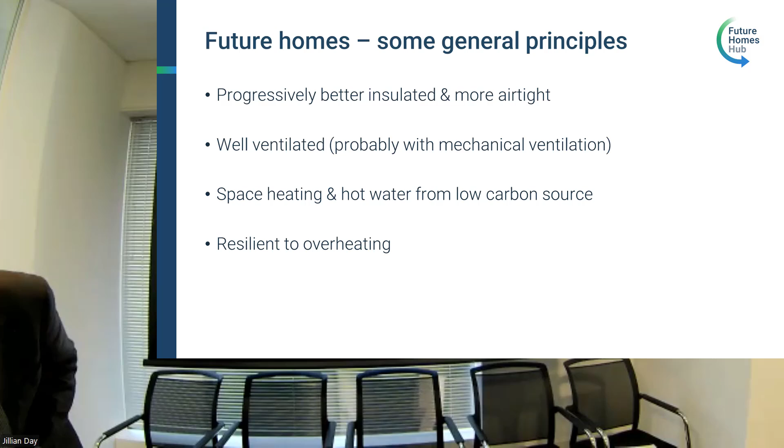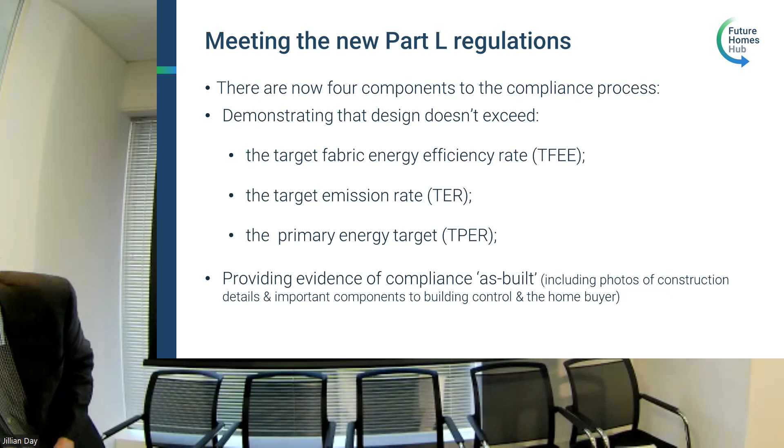But just to follow. Yeah. Yeah.

Sorry, just to continue from overheating, there's a slide that appears to be missing, which was to actually explain some of the general themes and the content of the document. And I'll try and do that while you're looking at the main criteria for compliance. And you'll be pleased to see that Part L has retained some of the catchy acronyms that we've had in previous iterations, but be very careful because they have changed slightly.

In terms of the content of the guide, overheating is one of the things that we weren't anticipating having to spend a lot of time thinking about, but actually discovered that it's very fundamental to thinking about the issues to do with Part L and compliance with Part L. And the reason for that is that there are some constraints on the disposition and amount of glazing and the aspect ratio of windows in a dwelling.

And Part O generally has two kind of components that you're needed to consider. So one is limiting the amount of solar gains, so external heat coming into the home. And then the second is making sure that there's enough provision to remove heat by having adequate ventilation. And you can see one of those is tending to reduce the glazing area, the other is encouraging you to open them. So there's a tension between the two aspects of Part O, and that has an impact on thinking about Part L.

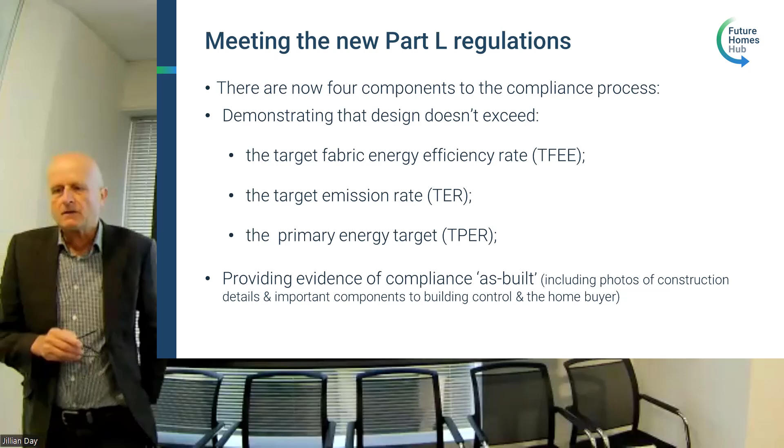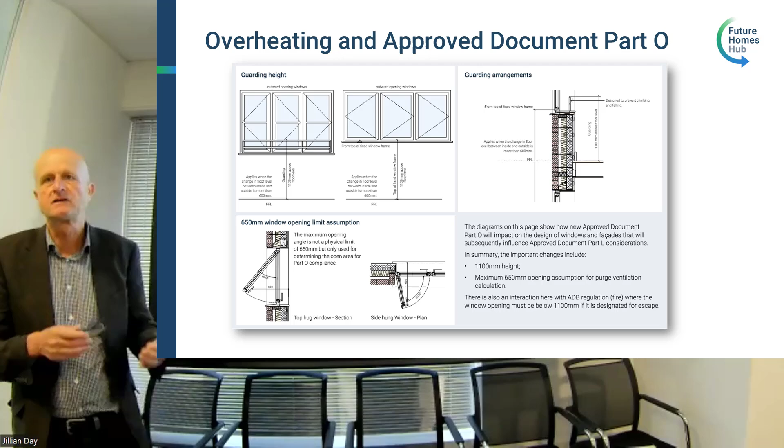And there are other recommendations to do with the safe opening of the window that, in producing the guide, we've been able to graphically draw what we think Part O says and have discussions with DLUHC about the interpretation and the implementation of Part O.

Now, the likelihood is that you won't be able to do things in that linear fashion now, that it would be really prudent to think about overheating, because overheating has an impact on the orientation of the home, for instance, the number of west-facing homes that may be particularly vulnerable, or the amount and extent of the glazing. So thinking about overheating,

Sorry, more technical glitches.

Yeah, I'll carry on. So thinking about overheating, for instance, in the specification of a window, may produce different window shapes and window sizes, which will then lead to a conversation with the window manufacturer about whether the aspect ratio of those windows can be produced, and a conversation about Part F and the increased provisions for background ventilation, and whether actually the ventilation can be provided through the window or through an overhead ventilator.

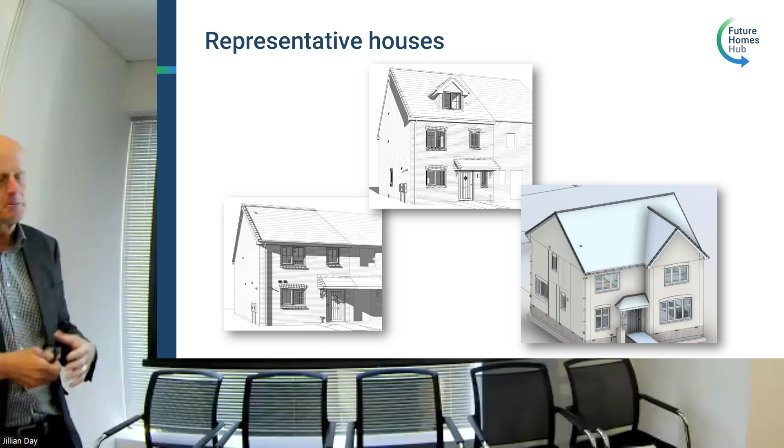And it won't be a surprise to you that of the 3 types, the room in the roof house is the one that we've found hardest to demonstrate compliance. And the reason for that is because the building regulations are now reflecting good practice and design, and they are discouraging you from creating complicated geometries, and in the instance of a room in the roof home, making a lot of surface area to enclose a very small volume. So the building regulations you will find are easy to comply with the fabric standards by making simpler homes. And of course, dealing with thermal bridging will also be much simpler.

Very quickly, before I hand over to David, to explain again, a lot of the work that's gone into the guide has been working with the steering group and with industry advisors to try and make sure that the solutions we propose are realistic ones. So if you refer to the notional building in the building regs, you'll see a set of target U values that the proposal is assessed against. But our solutions are actually ones that we think can be delivered. So we varied a little bit from the notional building to ensure that, for instance, a cavity wall could be constructed with readily available blocks and with insulation that is in readily available sizes.

And in each of the illustrations, we have 3 levels of performance. So in the masonry guide, we've started with a base case which is familiar to everybody of using a 100mm cavity and trying to work out what you would need to do if you stick with that cavity width in order to comply. We then have a kind of middle standard which explains how the notional building is working, how thermal bridging affects different building types, and the relative ease of using either fossil fuel heating, so gas in a combination boiler or system boiler, or an air source heat pump. And you can see from the results the comparison and the effect on all of the variables in doing that.

And the same principle applies to timber stud. So in timber stud, we've started with a fairly conventional 140mm stud with insulation between the studs and no secondary layers. And that's a base point that everybody will be familiar with. And then as the fabric specification progresses, it looks at adding insulation to those studs within the tested types that the Structural Timber Association has been working on, so readily available solutions that comply with other parts of the regulation, and then suggesting what the fabric standard might be like for 2025.

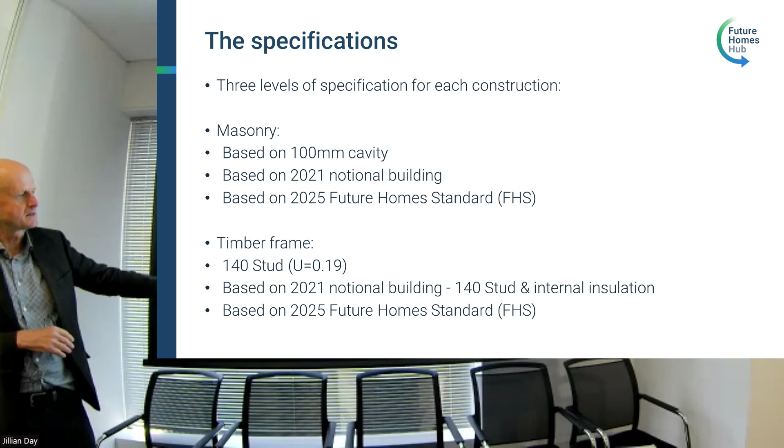David, I wish you a better technology experience. We shall see. We'll keep talking. This certainly will be a challenge if the visuals don't come across.

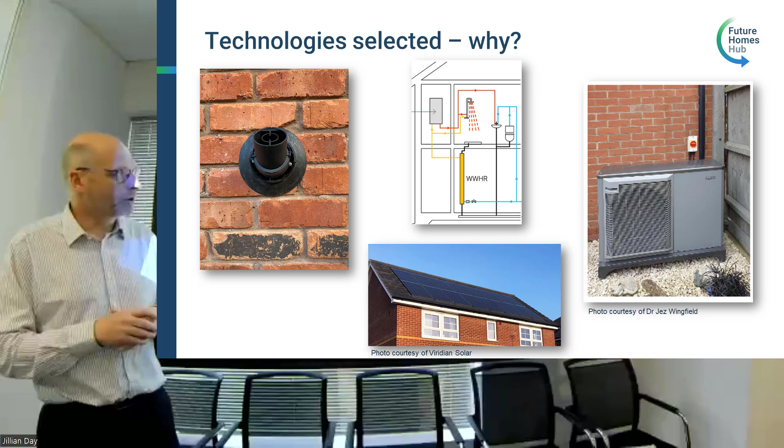Worth saying, for being able to convey the principles of the Part L, we've focused on very traditional technologies. So gas heating, PV, wastewater heat recovery, as well as, of course, the fabric measures. That is not to say that other technologies can't and indeed should be considered along the way. We had about 130 models anyway, and it would just be way too complicated to explain that. Remember, this is a where to start guide. This isn't suggesting these are the optimal outcomes. That very much depends on your house designs, your philosophies, the technologies that would work in those contexts, but it's a good starting point.

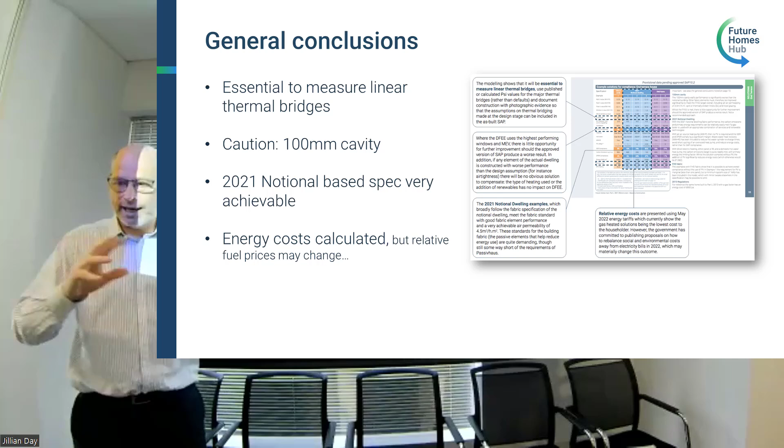So, in terms of the format of the guide, you're not meant to read the page on the right-hand side, but basically we are introducing, before we get into the details, some general conclusions. Don't skip this page. These are really important general conclusions, and I will pick them up as I go through an example on the next page. But what we're trying to do is present information in such a way that you can start to, by examples, using those representative house types, untangle what Part L 2021 means.

So there's a typical page in the guide. By the way, you can download it now. It's live on the homepage of the Future Homes Hub. And we've got 4 of these relating to the 4 house types. Basically, the mid-terrace and the end terrace are the same house type, but obviously different heat loss areas, so we have a page for each. The structure is we have all the summary inputs and calculation outputs. We have a commentary that's specific to the house type on the right-hand side and some important notes underneath.

For those that are perhaps a little bit more nerdy out there, I can guarantee you hours of fun.

Just zooming in, hopefully you can start to see some of these numbers, but I will just describe them. And initially, I'm going to take you through each of the 3 scenarios for the end terrace dwelling, starting with the 100 mil cavity. So a pretty typical 100 mil today. If you were desperate to stay with that cavity width, or indeed, maybe your homes have already been plotted, so you really need to stay with that cavity width in the interim, what would you need to do?

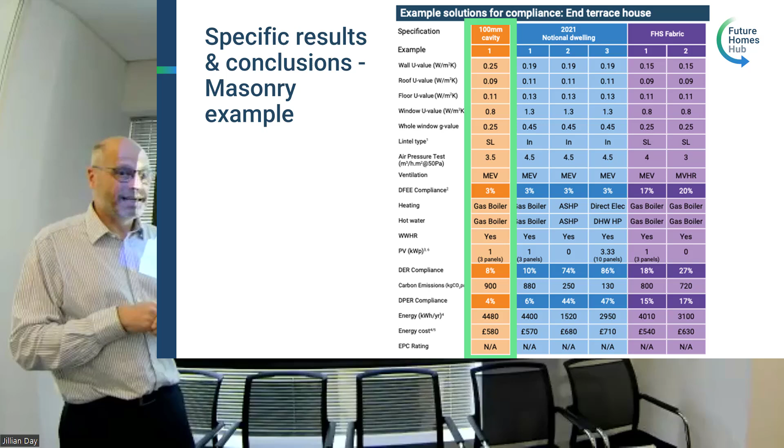Well, the 100 mil cavity and a U value of 0.25 is quite a long way away from the notional building, that notional home that the Part L has been built around. So if you're going to have a worse performance from those walls relative to the notional, then you've got to make up for that somewhere. And indeed, in the end terrace property, that means you're having to work much harder on the roof, much harder in the floor. You've gone to triple glazing, and thermal bridging is also pretty key here.

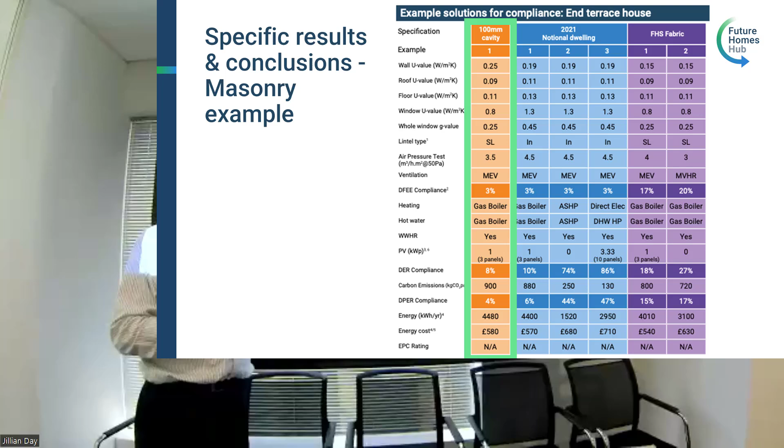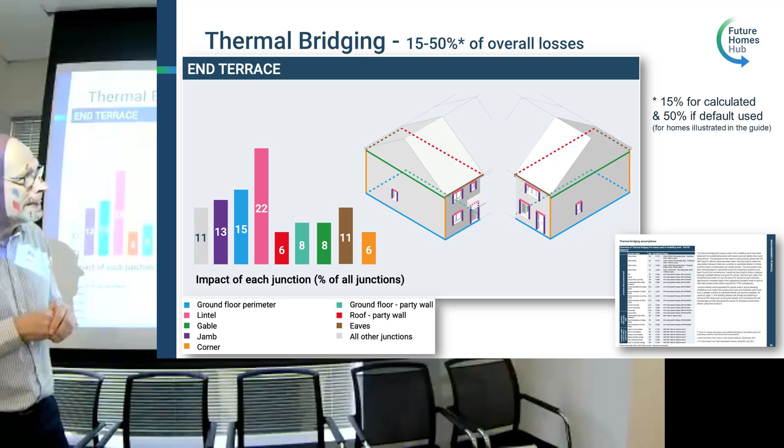So let's just switch across for a second, just to emphasize a point that Richard was making. Whereas in the past, you could use default values, and yes, there was some penalty, but you could build homes using the default. So it was something we all knew about, but we were allowed to park. Those days have gone. If you look along here, this is the contribution of each of the thermal bridges shown in colours. And to give you a sense of the total energy loss associated with bridges, if you were to use the defaults, that would be half of the allowed energy loss from the home. Even if you use the best calculated psi values, thermal bridges are still 15% of the energy loss. So you get the idea, bridges are now really important.

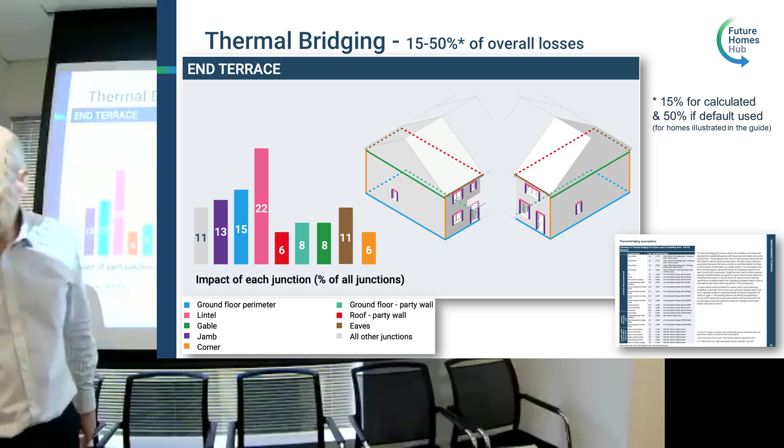And particularly if we take our end terrace, in our pink sort of mauve, not sure what colour it is, 22% of that heat loss is the window lintel. So in our 100 mil cavity example, where we're having to work really hard on those other elements because we've got a relatively poor performing wall, we are moving to a split lintel in order to really work hard. How far do we get? Ventilation: we're going to mechanical extract ventilation with an air pressure test of 3.5.

From a fabric energy efficiency perspective, a DFEE, we achieve it. Now, in this case, we've exceeded it by 3%, and that you'll see is a common theme. The minimum we've exceeded these by is 3%, simply because we are still using SAP 10.1. SAP 10.2 came out yesterday, or the day before. We will put these all through SAP 10.2 and recalculate. But for the time being, we've given ourselves a little bit of a margin. It's not a lot of margin, but it's a bit of a margin.

So what this is saying, in order to get the DFEE, the dwelling fabric energy efficiency rate, with a poor performing wall, we've had to work hard everywhere else. And I guess our general advice is, this is not a great starting place. It doesn't matter what you do with your services, that doesn't affect your DFEE compliance.

So you can do it, but it has a risk associated. Conscious of time, so let's move on to have a little canter through if we were to use fabric performance that is better aligned with the notional dwelling. They're pretty close, but they're not exactly the same, and we've explained why in the guide.

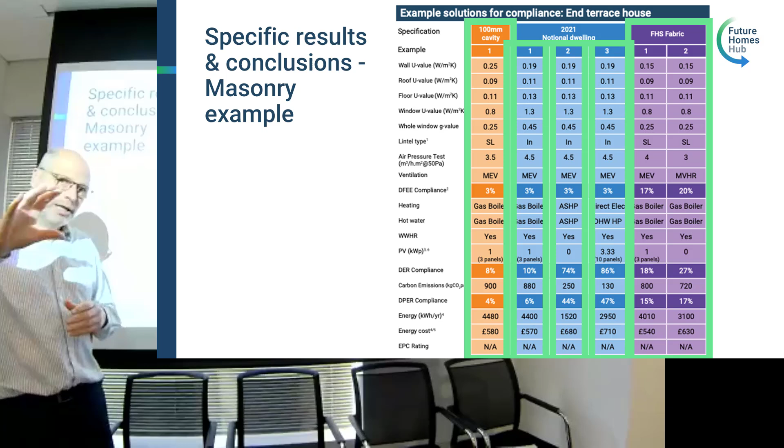But again, we've put a little note in there, keep an eye out because the government's saying that they will be putting forward proposals on how they rebalance costs away from electricity and potentially onto gas or elsewhere, certainly reducing those electricity costs that are currently supporting social and environmental tariffs. That would make quite a significant difference here. So just be aware that is in the wings.

We also looked at a direct electric heated version together with a heat pump for the domestic hot water. We got this to comply. You can see it significantly over-complied. The reason we've added back in PV that wasn't required for compliance purposes is to bring the running costs down. Without that PV in place, the running costs of that particular solution, as modelled, were coming out over £1,000.

And finally, the high grade fabric that Richard mentioned. So we've got higher performing walls, about 200 mil cavity in masonry terms, triple glazing, split lintels, etc. And then we've modelled those both with gas boilers, one variant with PV and one variant without PV but with MVHR, to give a sense of the effects of these different routes.

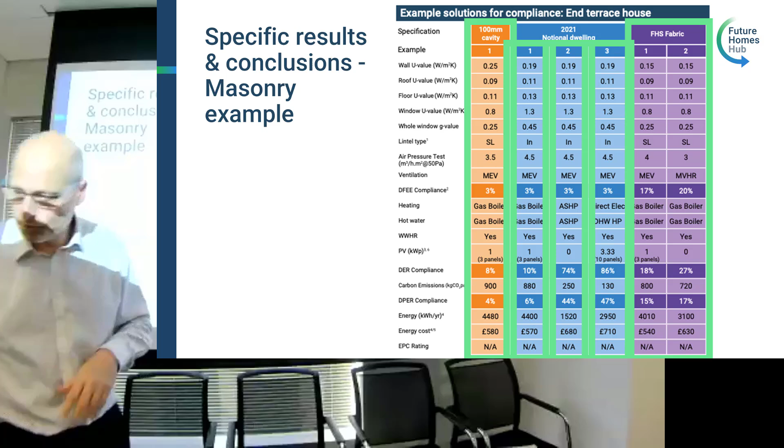So what we've tried to show is 3 different specifications, all of which comply and all of which have nuances. And in the guide that you'll see, we've put some commentary against all of those. So that's the compliance bit. But there's been a big step change that Richard also mentioned in terms of documenting and evidencing that what the design said has been undertaken on site and within the as-built SAP calculation.

So there's a little process here that each house builder will need to take, not a huge number, but some discrete photographs of particular details, particularly those that get covered up during construction. They get sent to the SAP assessor to check against the details that they were expecting the house builder to build to, and if necessary, a feedback loop there.

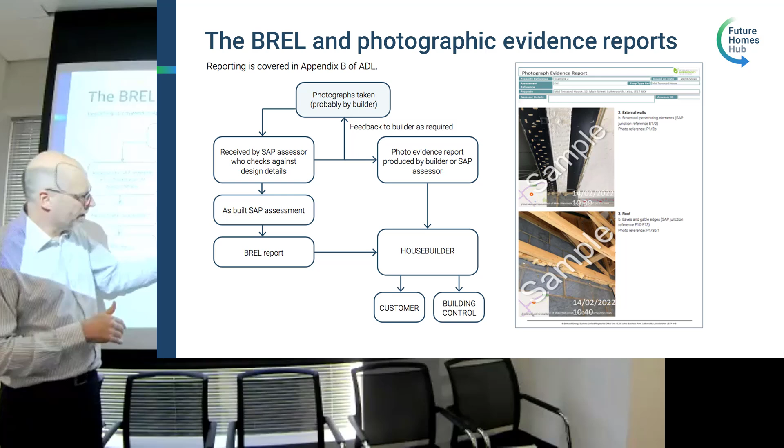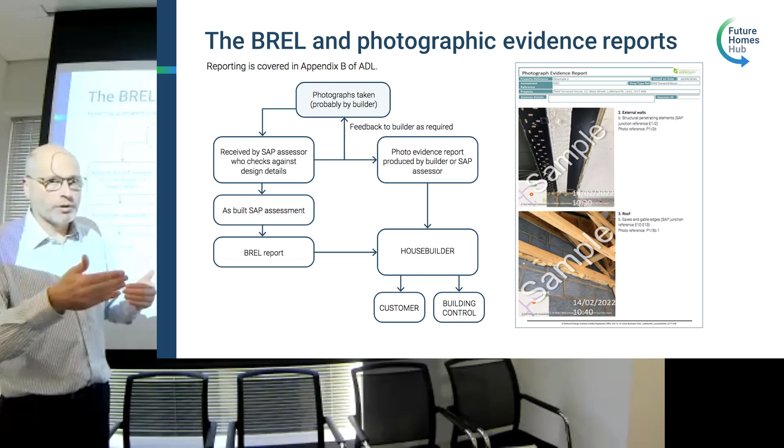Those, as built, then get reflected in the as-built SAP to create a Building Regulations England Part L report, a BREL report, that is passed to the house builder. Together with the photo evidence, both of those are sent to building control and the customer. Real key to be on top of this, because these are taken as things are covered up. If you miss these steps, what are you going to do? So really one to pay some attention to, and I believe there's going to be some additional guidance on that.

So finally, why read the guide? I hope what we've given you is a little bit of a taster of what's contained in that. It is aiming to give a really good, pretty broad understanding of all of the facets of both the Part L, but importantly, how you need to approach the compliance with Part L.

If you take away one thing only, there are some things like energy and overheating which need to be considered much earlier on, almost certainly before planning, because it will have an impact on the design of that dwelling. And your options for kind of fixing it later are really very limited. Almost certainly you'll end up going back to planning.

So that, I have to say, Part O took us a bit by surprise. And what we're wanting to make sure is that message gets across to you so you don't get taken by surprise too. Thank you very much.